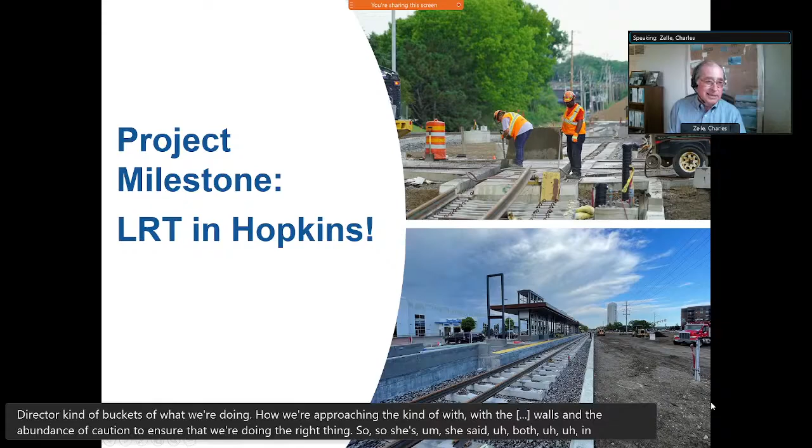She asked me what I thought, and then I asked her what she thought. She said, no, you're doing the right thing, and we're tracking what you're doing with their staff. So she feels informed, and I think it was gratifying that they weren't showing any alarm or concern.

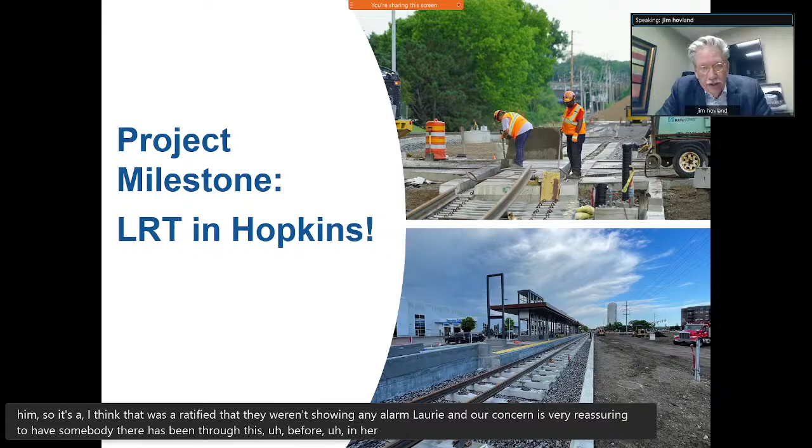Yeah, that's very reassuring to have somebody there that's been through this before, in her native state of California. That's great. Thank you. Yep, any other questions or thoughts before we start? I don't want to cut it off.

All right, Jim, let's hear about the project. All right, Mr. Chair, Jim Alexander, Project Director for Southwest LRT.

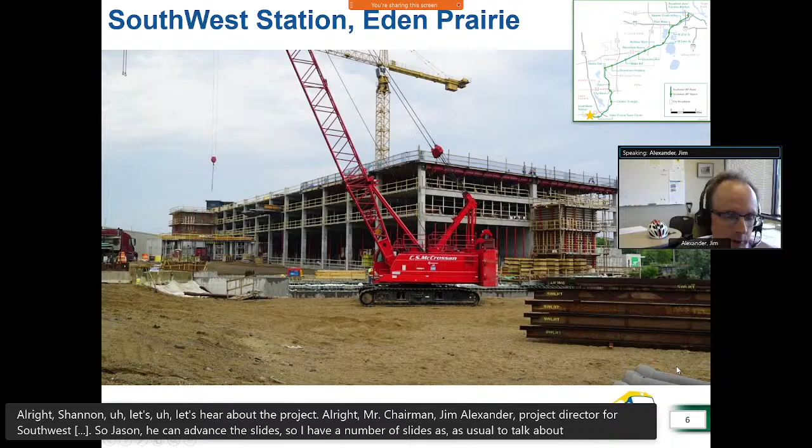So Jason, if you can advance the slide. I have a number of slides as usual to talk about construction, mainly civil construction. I just want to note that this is not just a Twin Cities project, but affects the whole state. There's 64 of the 87 counties within the state where someone's bringing home a paycheck from this project, and that's significant. We like to see that spread, and it's very important that that be known, because it does spread widely here.

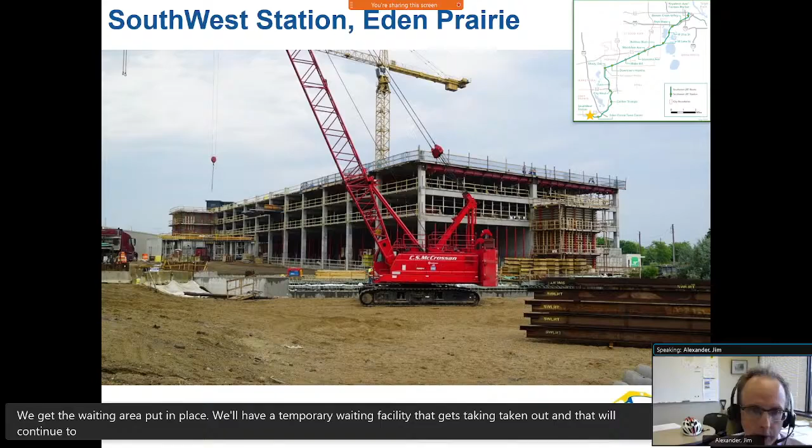So we'll start out at the west like I typically do, and this is Southwest Station. This is the parking ramp that the contractor is building. Lunda McCrossan Joint Venture is the civil contractor, and most of the structure is now in place. There's still a lot of finish work that needs to be done, and a waiting area that you can see the semblance of off to the left there in the background, being built right now. Very challenging site. We've got a lot of piles, still more piles to do. On the south side of this ramp, once we get the waiting area put in place, we'll have a temporary waiting facility that gets taken out, and we'll continue to build structure for the access into the ramp there.

Next slide, Jason. So this is our first major bridge, Prairie Center Drive Bridge, and you see the semblance of rail starting to happen here. This is what's called direct fixation track, where the track will be set on concrete blocks, if you can see there. That's getting well underway here.

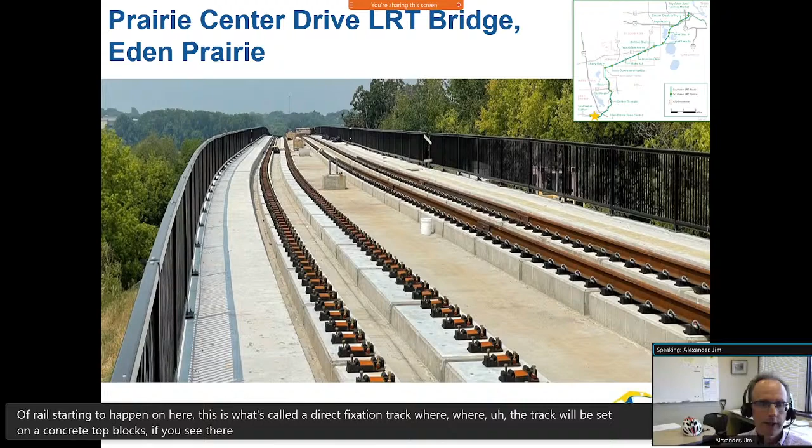Some artwork that was actually funded by the city of Eden Prairie for our Valley View LRT bridge, looking nice there as we progress across the Valley View interchange over to 212, which we have a couple of slides on as well.

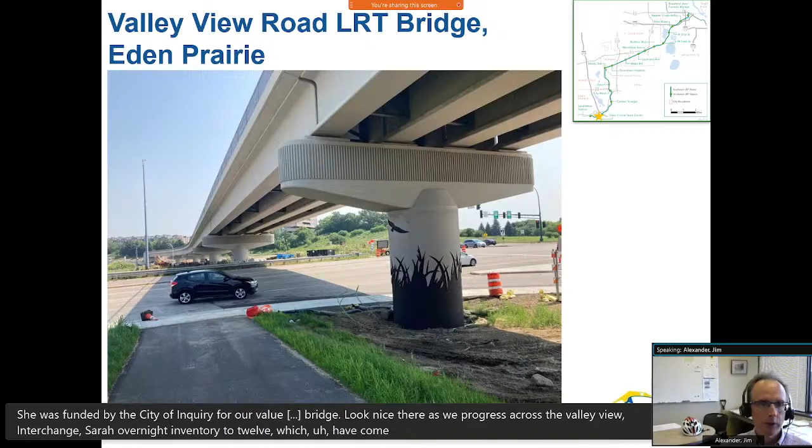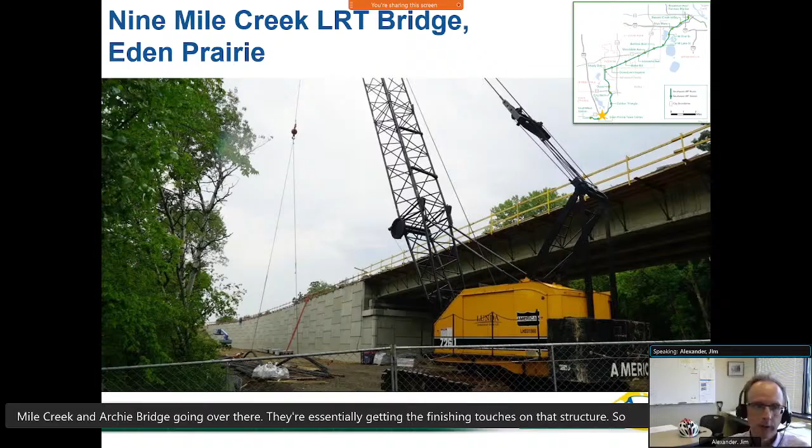This is another bridge we have over Nine Mile Creek near Flying Cloud, with the LRT bridge going over there. They're essentially getting the finishing touches on that structure itself, and we'll look to have some rail being placed on that later this year.

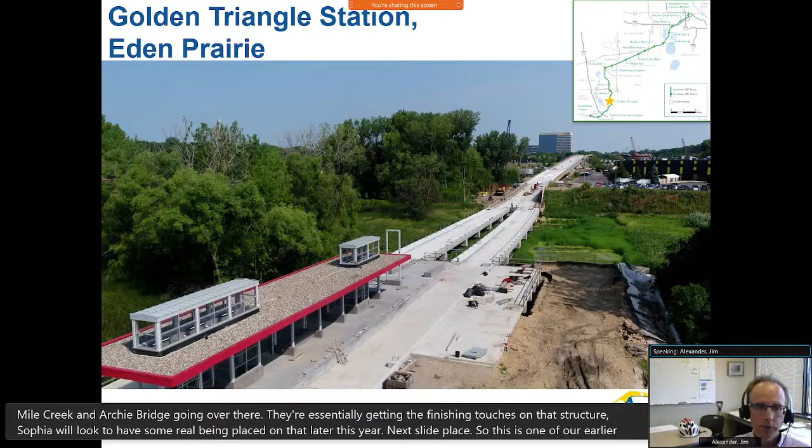So this is one of our earlier stations that has been mostly constructed, Golden Triangle Station, and you can see off in the distance as we head over to City West, we have essentially a piled bridge structure that takes us over to Shady Oak and over 212.

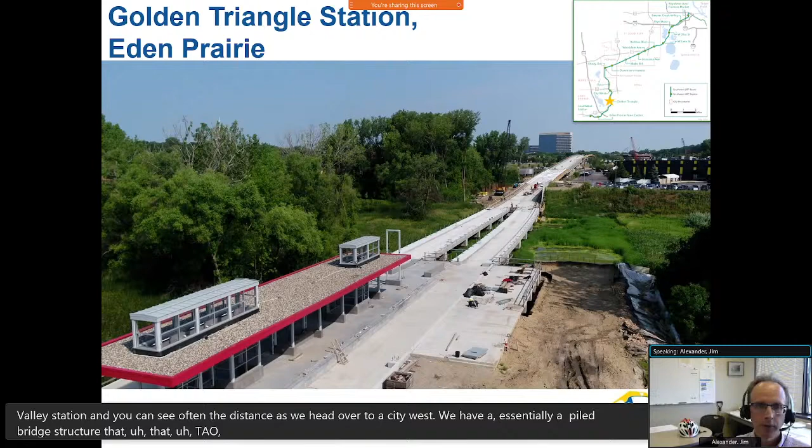You can see some 10-foot high steel beams that were put in place earlier this summer. Quite an event—we appreciate the partnership we have with MnDOT in closing roadways and making that all happen. We had to close 212 for about a week to get these beams put in place, and so that structure is starting to take shape with deck work being done on it.

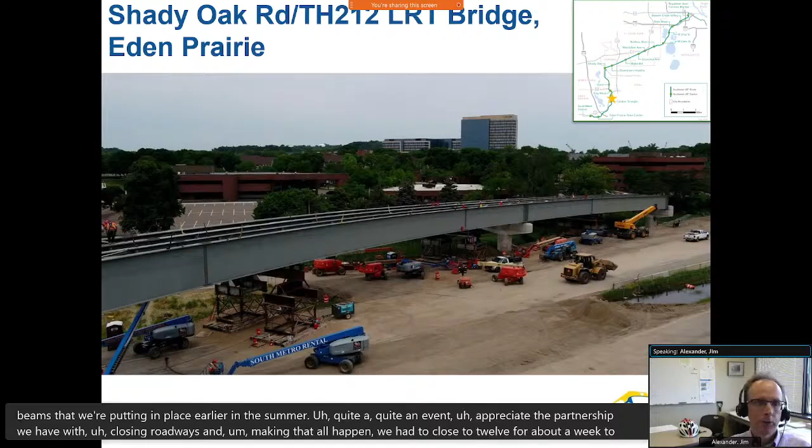So this is our tunnel that goes under Trunk Highway 62, nearly complete for the structure itself. This is looking northward, and you can see the travel lanes. We've shifted the travel lanes a couple of times to accommodate the construction. We'll eventually be shifting the lanes back toward us in the image there for the final layout of the travel lanes, and work will continue inside the tunnel itself.

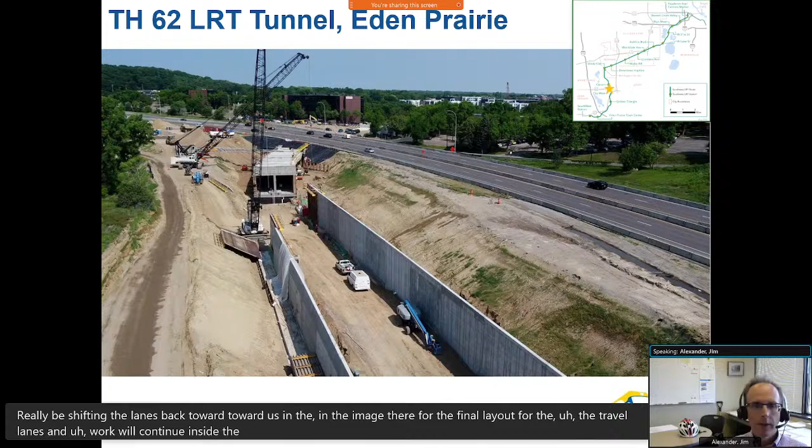This is progressing just north of the Opus area, where we have a roadway bridge for Smetana Road that you can see off to the left, and down below where that crane is sitting, that's where the LRT is going to be going through. We'll eventually have another bridge over this area for Feltl Road, and then we'll embark on one of our longest bridges, which heads over to Shady Oak Station.

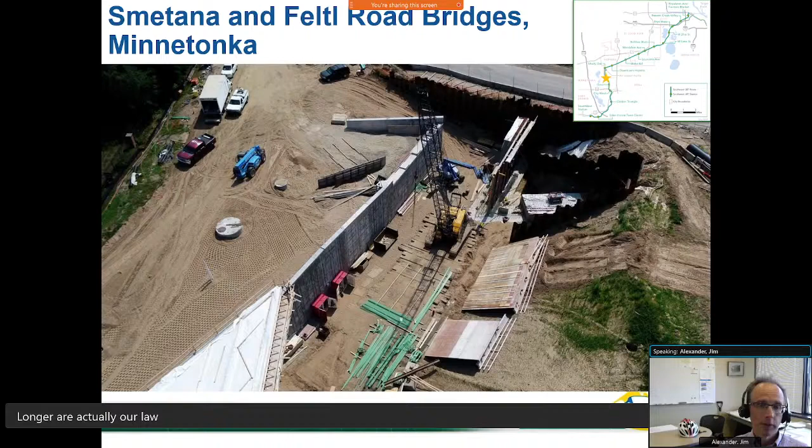And that's this structure here. You can see most of the piers are in place. This is going over the Bass Lake Spur freight rail line, and they're starting to put some beams on this structure.

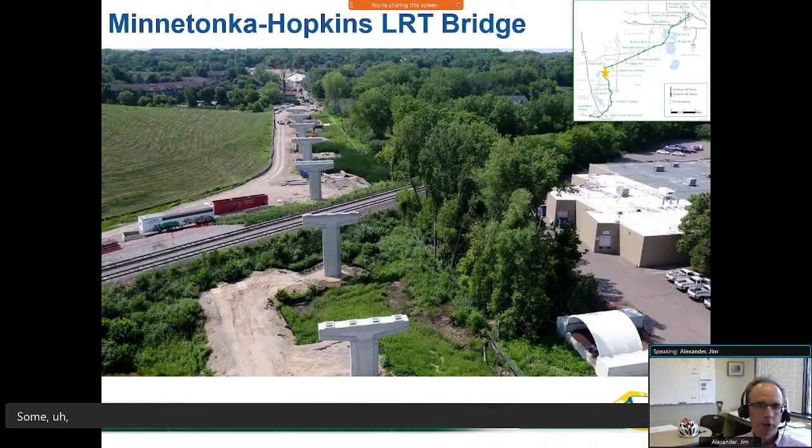So Shady Oak Station in Hopkins—that structure is taking good shape there.

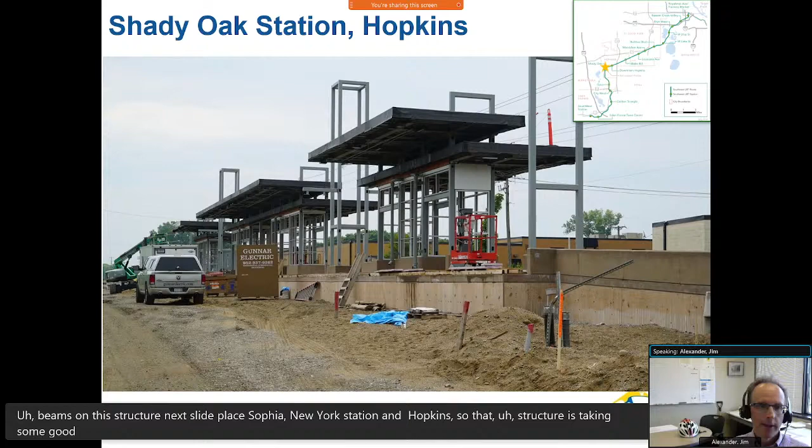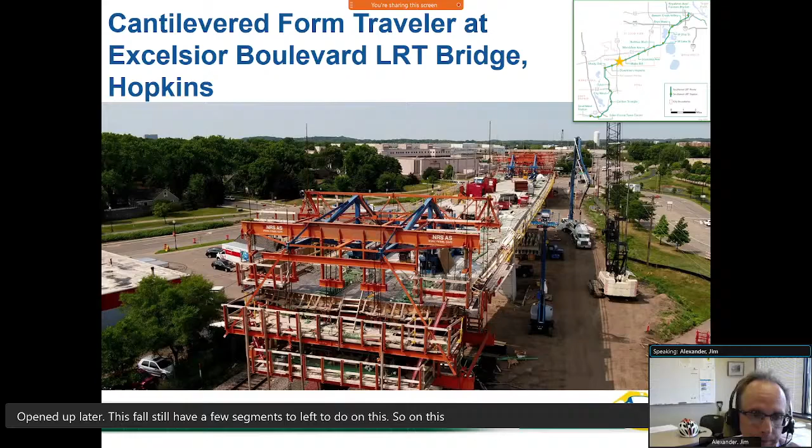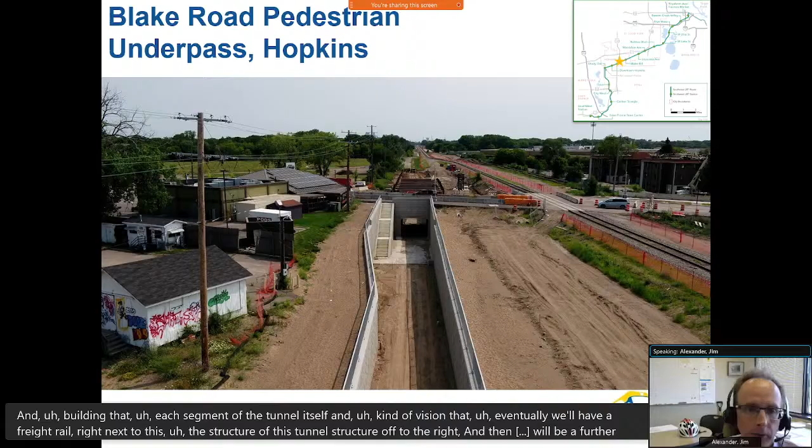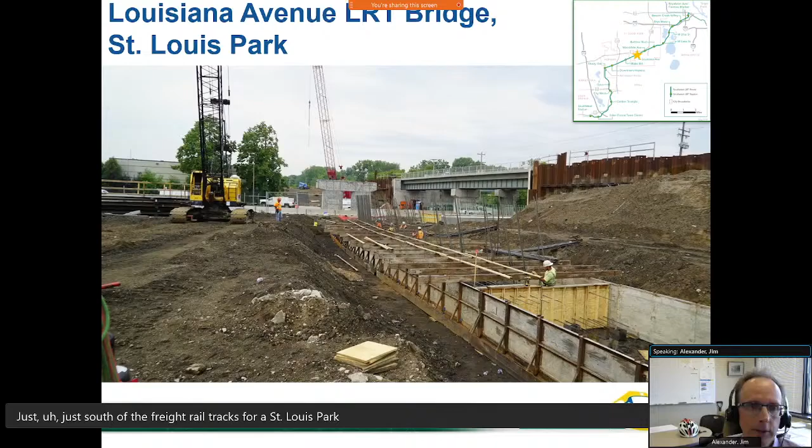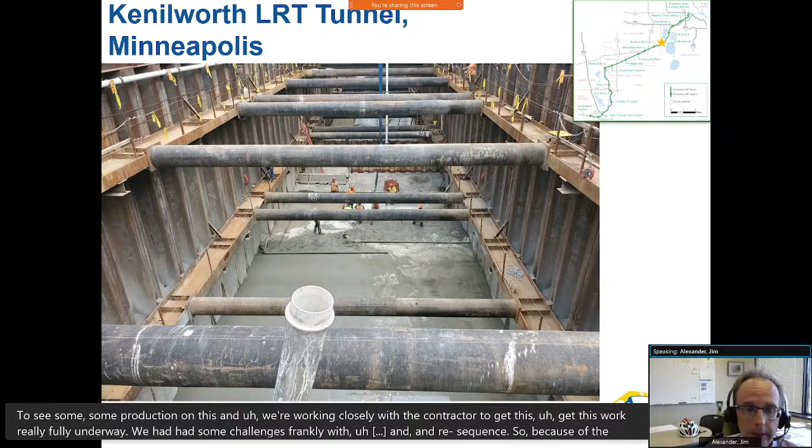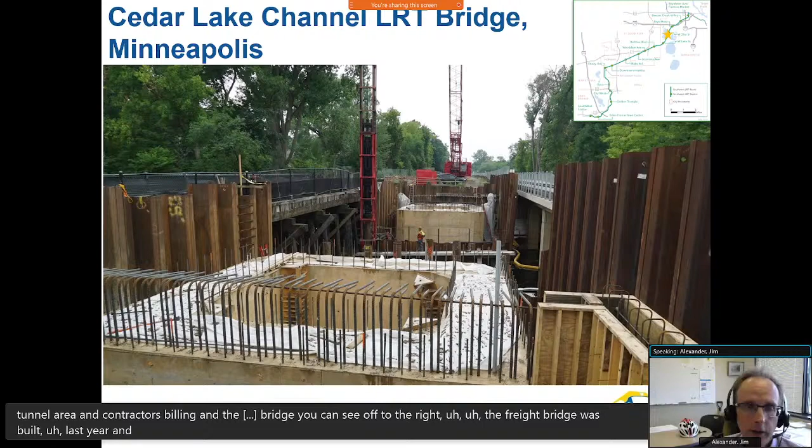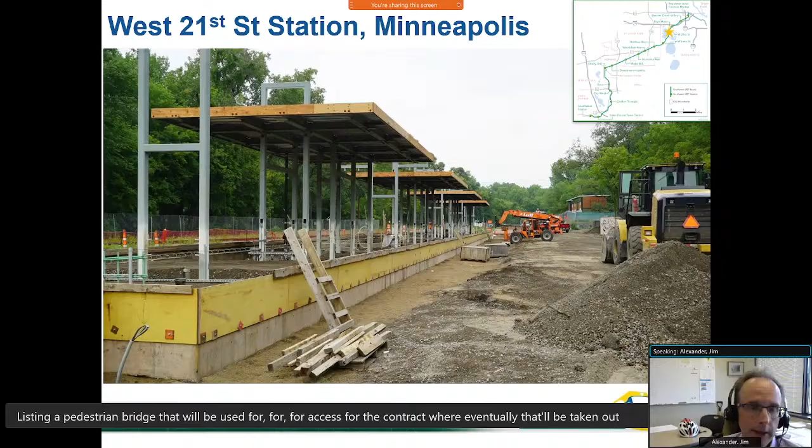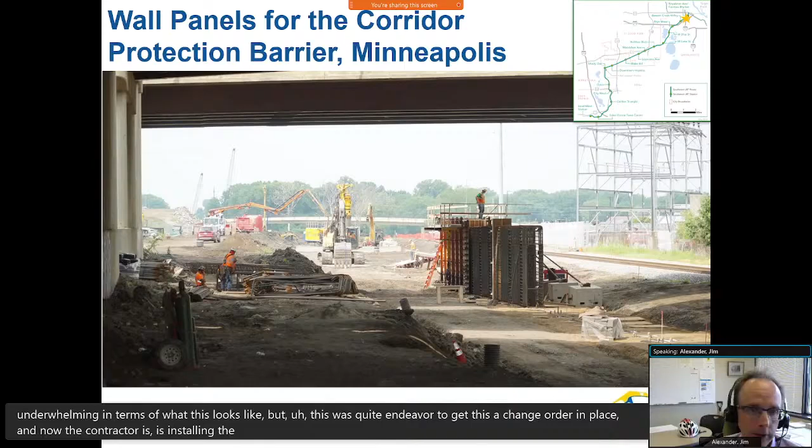This is the corridor protection work. It seems a little underwhelming in terms of what this looks like, but it was quite an endeavor to get this change order in place. Now the contractor is installing the drilled shafts, of which there are over 400. This 10-foot high wall, at least on the freight rail side, is starting to take shape as we look under. This is just under I-94 here.

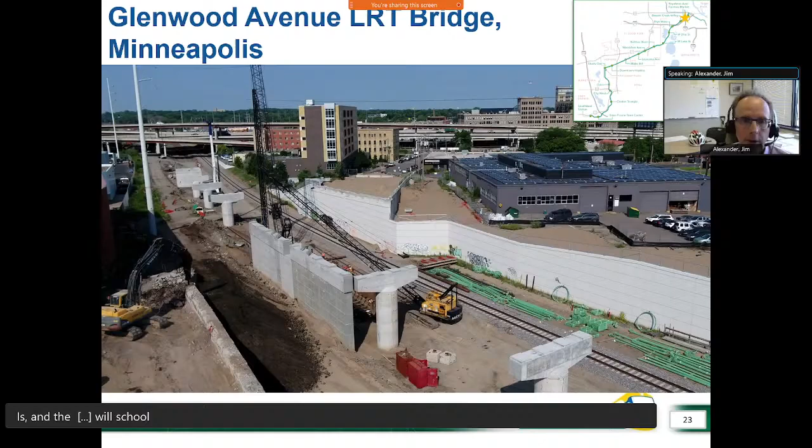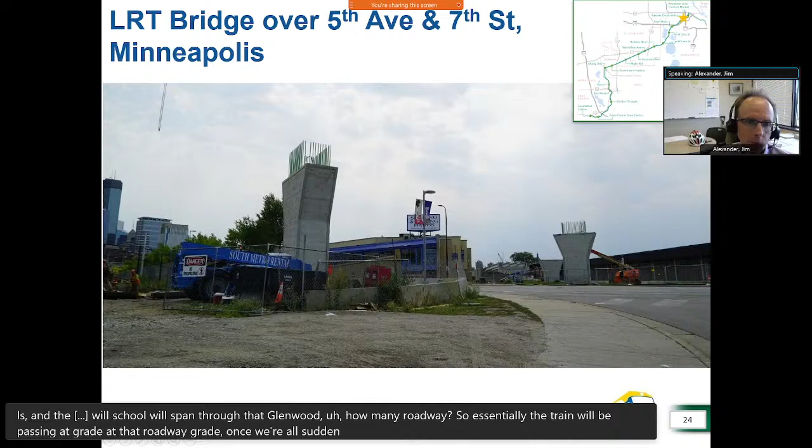This is the last image we have for civil construction, showing our piers for the bridge structure that carries over from the Royalston area in the distance, eventually linking into our existing system for the Blue-Green Line at Target Field Station.

Maybe I'll pause there, Chair. If there are any questions on the civil construction, I'll be glad to take those. Any questions?

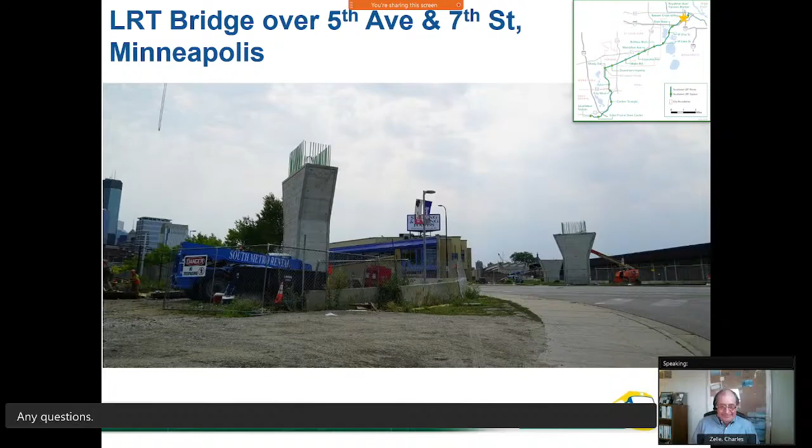No, all right. Okay, well, we'll move on to systems. I have a couple of images, mostly around the traction power.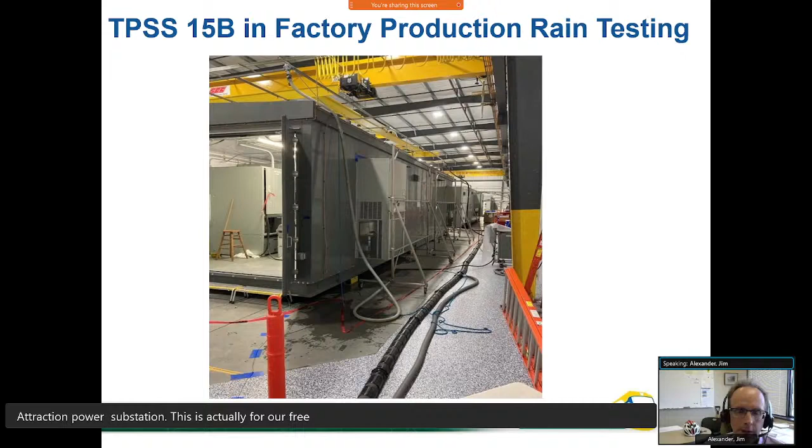This is just going through some testing. We have to go through a lot of rigorous testing on these units. This is the TPSS, the traction power substation, for our Franklin facility that we are modifying to accommodate the 27 vehicles. You can see it's getting in place here; we now have that in place, and the contractor is going through some testing. Quite an endeavor to get these units out - it's kind of a big box that has a lot of componentry inside it to help power the trains.

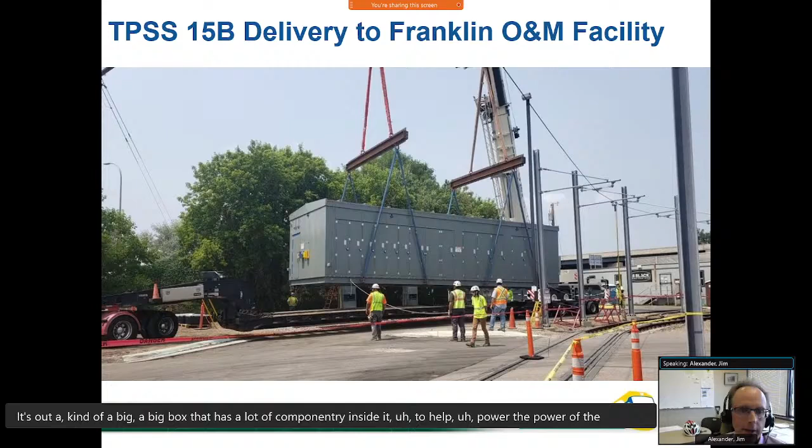Next, I have a couple of images of the Franklin facility.

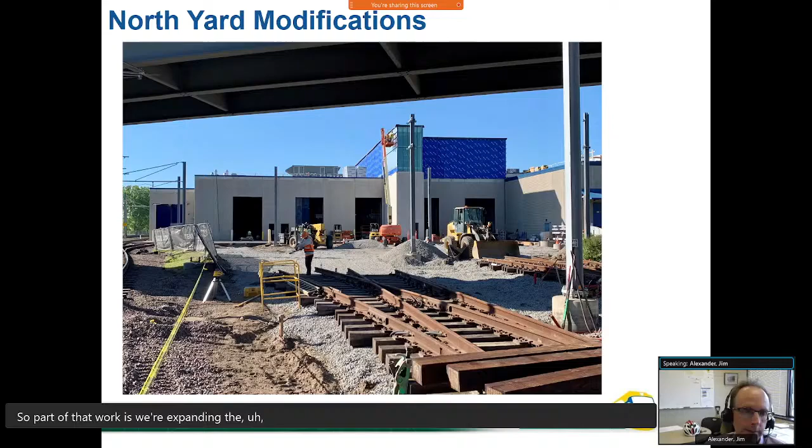So we have our contractor LS Black doing modifications to accommodate those 27 vehicles. So part of that work is we're expanding the maintenance area, and up in that bluish area is our new rail control facility that we've had to put upstairs, so to speak, so we could accommodate more room within the building itself.

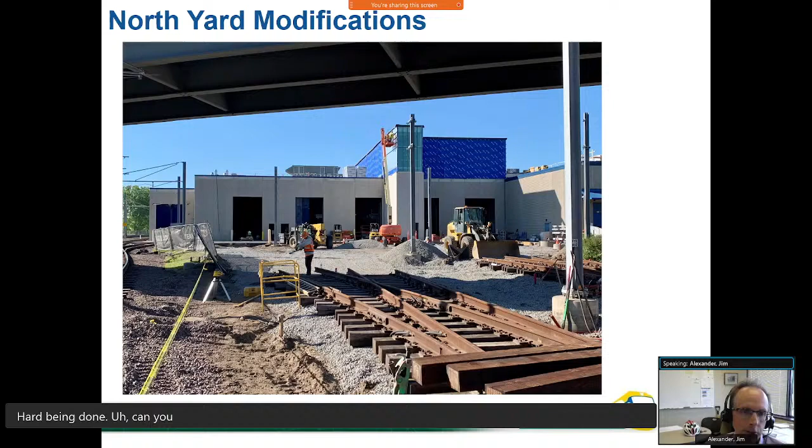And so we have modifications in the north yard being done, getting that wrapped up. This contract should be done later this year. And I got another image, I think, on this slide presentation.

So we also built out some what we call a west runner track. This is just west of our storage area at the Franklin facility, and this will accommodate storing vehicles outside. You may recall, because we had to take the OMF out of the program from the Hopkins area, we've had to do some modifications to accommodate the additional vehicles for Southwest LRT.

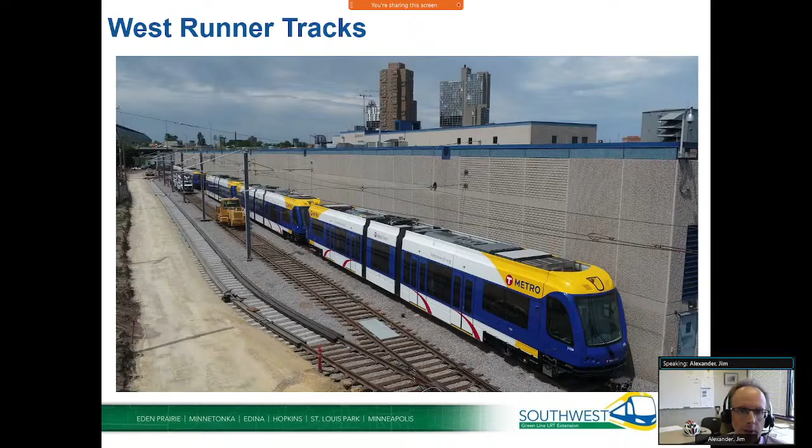So I think that might be the end of my presentation. Maybe I'll pause if there are any questions before I hand it off to John.

Yeah, great. Thanks, Jim. And I know, first of all, boy, really seeing all these images, and we all kind of inspect. I kind of look into the Kenilworth Tunnel from the walk from my house, but I know everybody along this line has different views. But to see it all together really shows how far we've come. It's really an incredible project.

I know a few of you have to leave for regional council mayors or some other activities, so I want to kind of open it up to any comments or questions we have at this point.

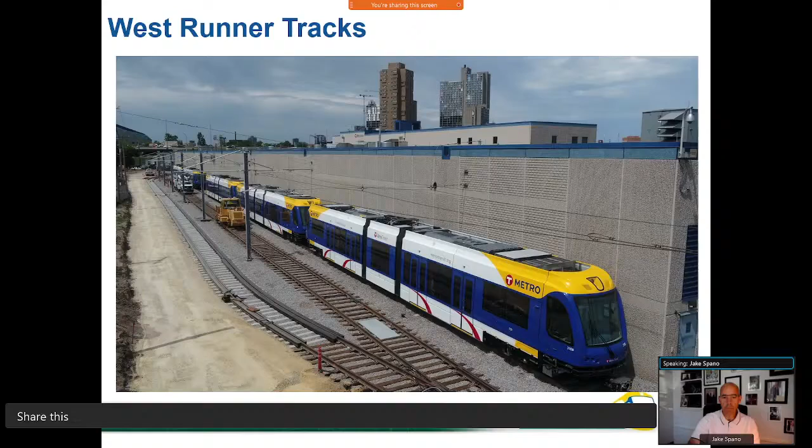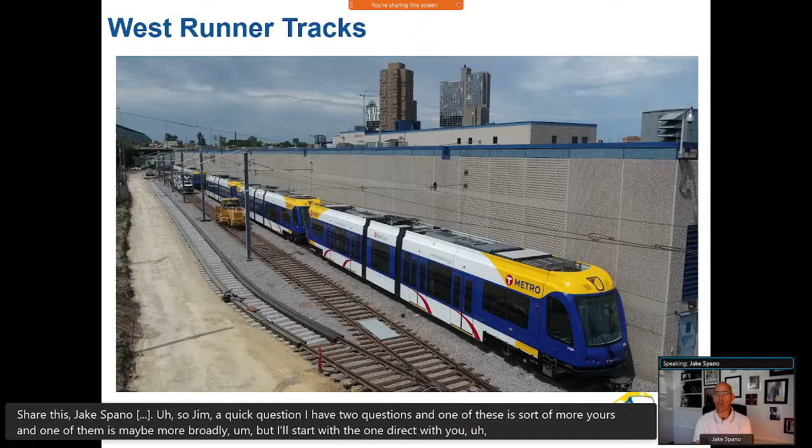Chair, this is Jake Spano. So Jim, quick question. I have two questions, and one of these is sort of more yours, and one of them is maybe more broadly. But I'll start with the one directed to you. Trail reroutes and detours. Mayor Gadd and I have raised this in the past about the desire. I was walking on the North Cedar Lake Trail this morning with a friend, and we were talking about this.

And so I'm just wondering if you can give any sort of sense about timing or staging around reopening those detours. Yes, Mr. Chair, Mayor, I can speak to that. So maybe if I could start from the east, because that's kind of how I think about it. Of course, the area around Glenwood is going to remain closed until we get that construction done. We're still hopeful that we can get the Glenwood Bridge, the roadway, back into service in 2022, and that's currently what we're looking at, and we'll have to keep you updated as that moves forward.

The Kenilworth corridor, we're still working on schedule in terms of when that tunnel can get done. As the chair had spoken earlier, we're in negotiations with the civil contractor on that piece. But as we head from the Kenilworth area over to Beltline, that area is tied so closely to the tunnel work that we're going to have to wait and see with the Kenilworth tunnel and see how that schedule goes. But from Beltline to Wooddale, we are hopeful that we can open that up toward the end of the year here.

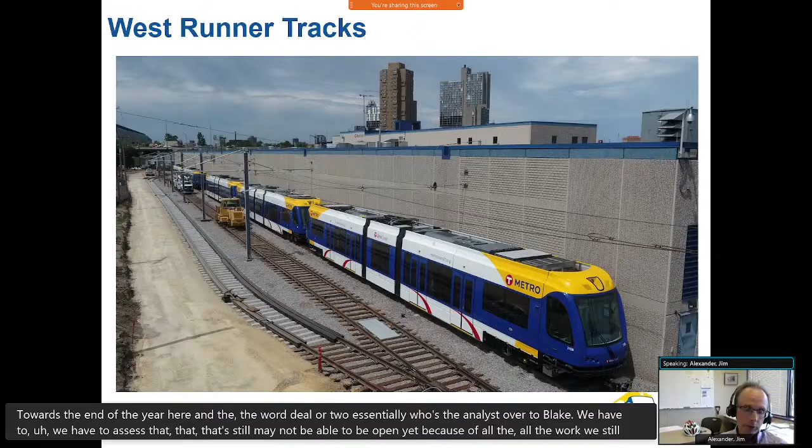And the Wooddale over to essentially Louisiana, almost over to Blake, we have to assess that. That still may not be able to open yet because of all the work we still have yet to do. We're working closely with our contractor to see what we can open there, but in all likelihood we probably won't be able to get that done this year. There is a segment from the Hopkins Depot over to 11th that we are looking to be able to open toward the end of the year. We're working with our contractor on that as well.

And so we work closely with our contractor to keep this updated. I know there's an interest out there. I have a personal interest, being a biker, that I want to see these trails open as soon as possible. And so we continue to put pressure on that, but just when it's safe to do so and when access is not needed. Given, if any of you have been on this corridor, any parts of it, it's very tight in terms of where the contractor can work and where they have to put their materials, where they have to be building things. There's not a lot of access. And so that kind of limits our ability to open up trail access easily or safely.

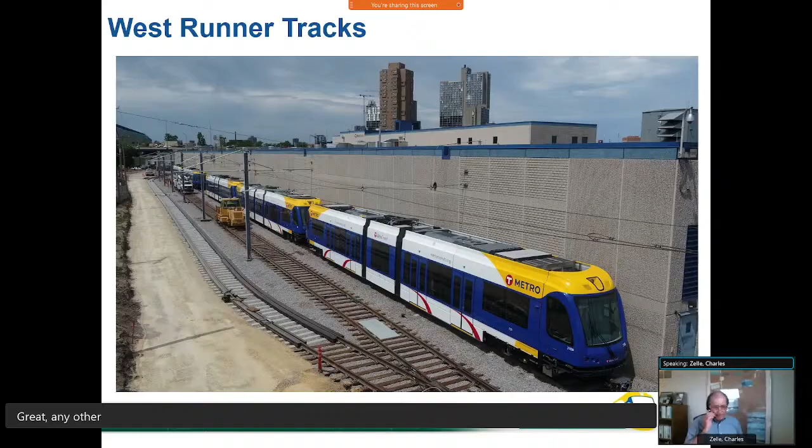Great. Any other comments, questions? Mr. Chair, Jim Hovland again.

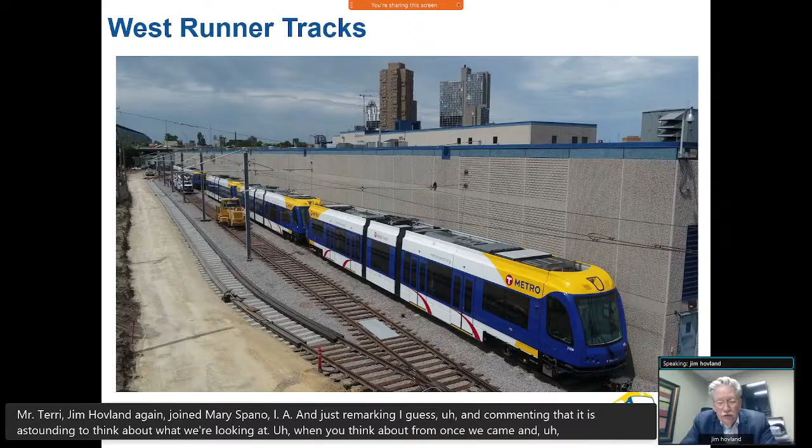Join Mayor Spano in remarking, I guess, and commenting that it is astounding to think about what we're looking at when you think about from whence we came, and Jim Alexander, your crew, your predecessor Mark Fuhrmann, all the people that have led us so ably and are putting this line in place, a 16-mile line that helps us create a system for light rail transportation in our region. We've all viewed this as something tremendously important from a global standpoint. If we want to be a player globally, we need to have these kinds of public transportation options in place, and that'll help us with our economic development strategies, both regionally and at the state level. So I'm just awestruck by what I'm seeing in your slide presentation this morning, and so pleased with the work that's been done.

And thank you sincerely for all this wonderful work that you and your team and your contractors have done to get us this far. I know it'll end up being a tremendous project. Thank you.

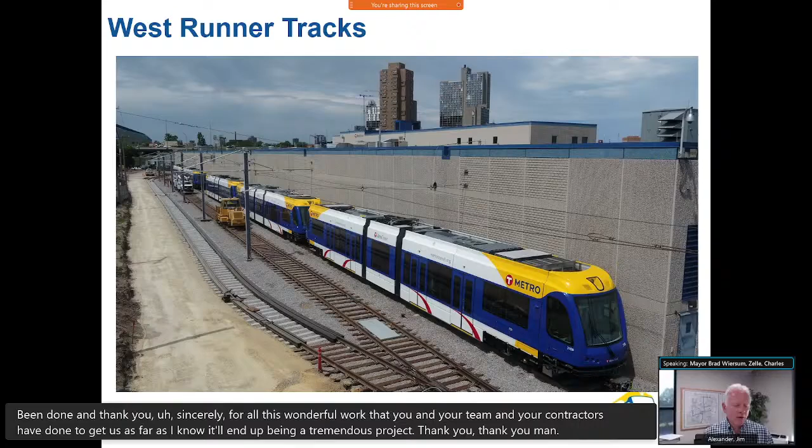Well, thank you, Mayor. If I could comment, this is Brad Wiersum. I want to really thank you for this presentation and for these updates. Seeing this come alive is very exciting and gratifying. And clearly, I'm looking over in this office right now at the shovel from the groundbreaking, and the progress that's been made is tremendous.

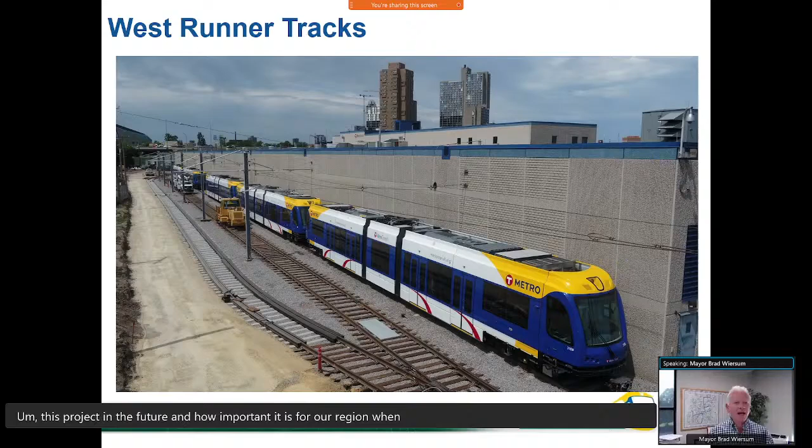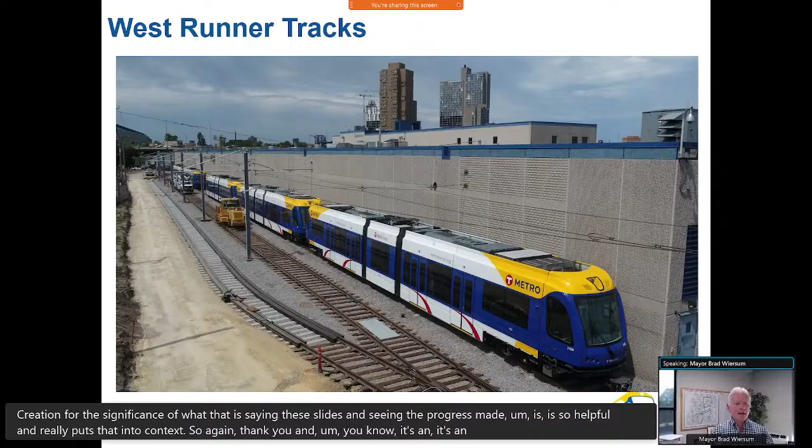This really gives me confidence about this project and the future and how important it is for our region. When this was a concept, and the words that Chair Zelle used a bit earlier, this is the largest public works project in the history of Minnesota, that all sounded nice, but I had no appreciation for the significance of what that is. Seeing these slides and seeing the progress made is so helpful and really puts that into context. So again, thank you, and it's an exciting time, and these updates are very, very helpful. So thank you so much.

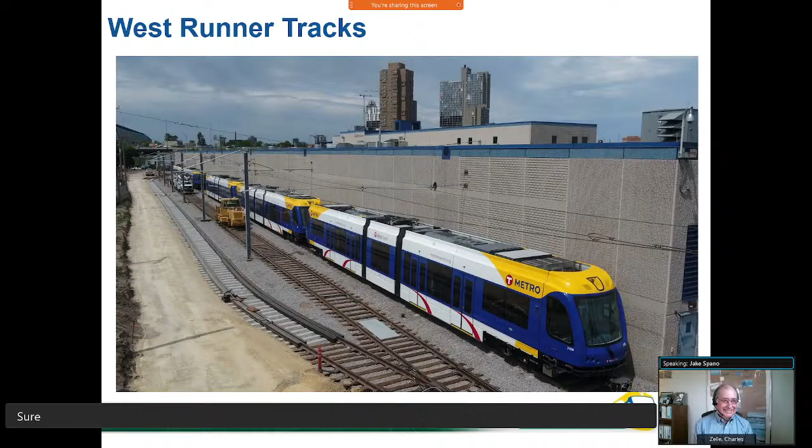Chair Zelle, I have one other question, and I'm not sure where it should fall. It's not really a construction question, but given Jim's historic engagement with this project—Jim has been there as long as anybody—I want to be clear, the questions I'm raising about bike trail detours, if Brad or Jim or anyone else got the impression that I'm not enthusiastic, I am totally enthusiastic. I just want to make sure that we can get those spaces open back up to the public as quickly as possible.

I do have a question though, a higher level question really about the shift relative to COVID. I have seen, and we have all seen, transit ridership numbers are down, especially—and I can send some source material if it's of interest—but especially bus rapid transit ridership into and out of the urban core, really down drastically, right?

And so the reason I raise it is because we are in the middle of approvals around the Beltline area station development, and that location is the site of, I think, a 500-plus stall park and ride. It's been so long since we talked about these specific numbers that I might have forgotten the details, but as we've been talking with the developer about that, they're really unable to—we've talked about building it in such a way that it could be converted into another use in the future if the park and ride was no longer needed. I understand, because I was part of that approval process, that those spots were required to get FTA approval.

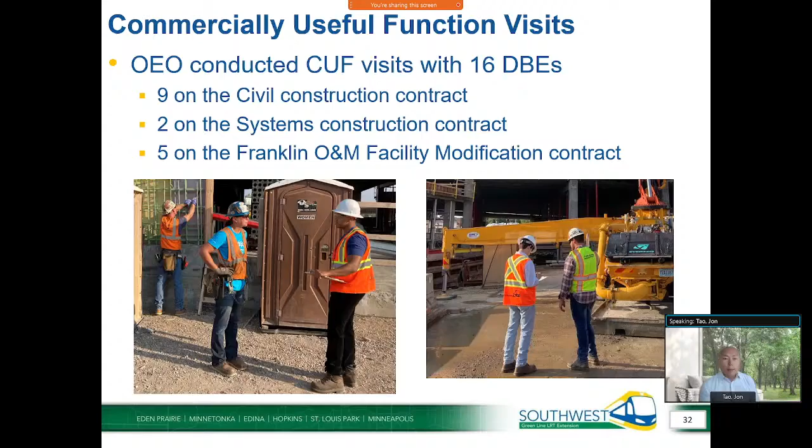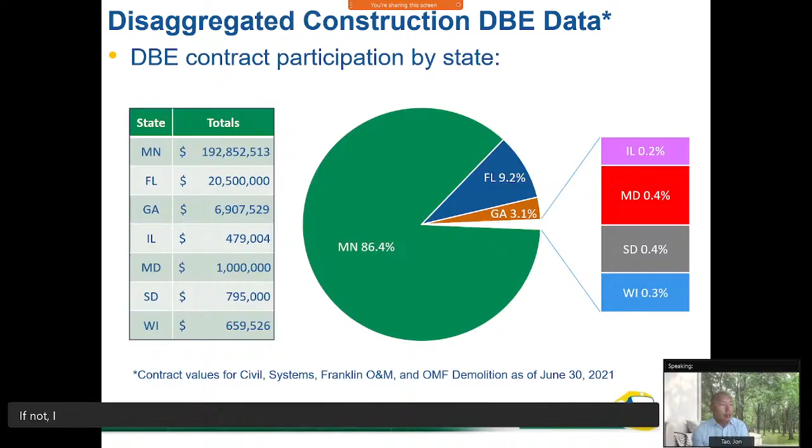Okay, so for workforce, we work pretty closely with the Minnesota Department of Human Rights to monitor contracts for compliance and workforce requirements.

One thing to note is that the prime contractor has been working with community-based organizations such as the Minneapolis Urban League to host virtual interviewing sessions for this hiring season. Also, as other projects in the area are winding down, they are transferring workers from those projects over. One such project is the MnDOT 3594 construction project. As that one's closing down, some of those workers are being transferred over, and they are sharing that they are transferring the women and people of color if possible.